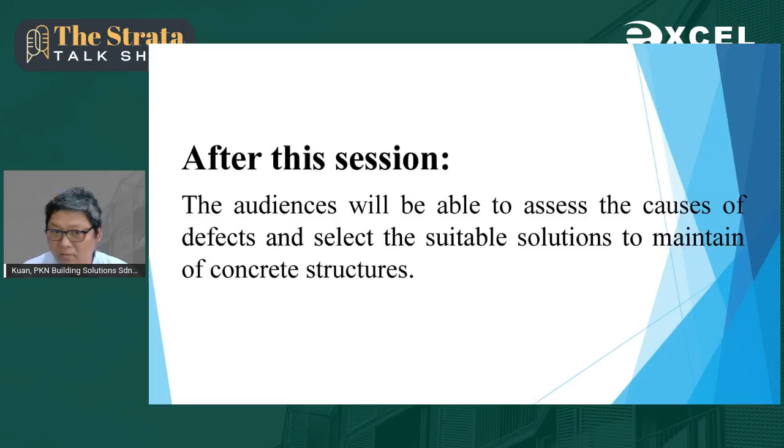This session is to help the audience understand why concrete needs maintenance over time, as it is not as robust as before. I hope everyone can hear me clearly. Can I have some comments if you can hear me clearly?

I'm a speaker on interfloor leakage and also a speaker on EN1504 for the Institution of Engineers Malaysia, on crack prevention and remediation measures for leaking walls and cracks, also for the Institution of Engineers Malaysia. I've spoken on advanced building inspection for a conference organized by JKR and UM jointly, and on defect management in stratified buildings for the Royal Institution of Surveyors Malaysia. I'm also on the drafting committee for CIS 7 about QLASSIC for the latest version.

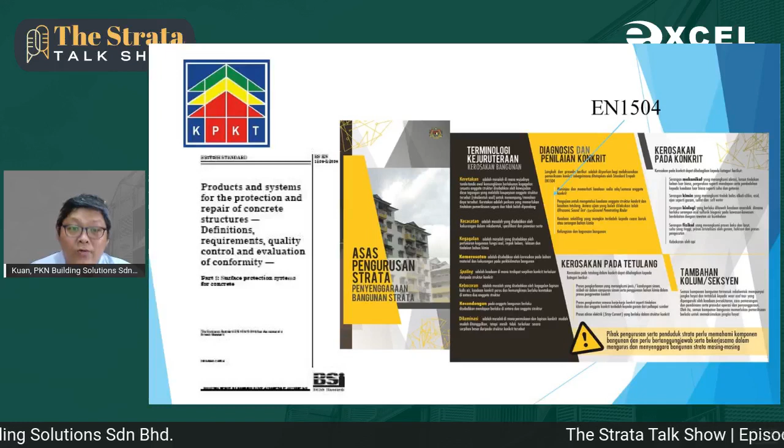Why are we talking about the repair and maintenance of concrete structures based on EN1504? There's a good reason - it's recommended by KPKT, and it's a national standard for Britain and the European nations, which approaches concrete maintenance in a holistic and scientific method, from multiple disciplines including corrosion engineering, addressing root cause for optimization of life cycle cost and durability. This is a brochure published by KPKT recommending EN1504 for the diagnosis and repair of concrete structures.

Pemeliharaan bangunan strata. Okay, in fact, besides EN1504, you can see clearly that it was only launched in 2009, so it's pretty new knowledge. Thereafter, America and Australia tried to catch up - the American community under the American Concrete Institute launched 562 in 2016, and the Australian community launched their guide to concrete repair in 2018. So this is really new knowledge being promoted globally, due to the fact that concrete is not as robust as what we used to think.

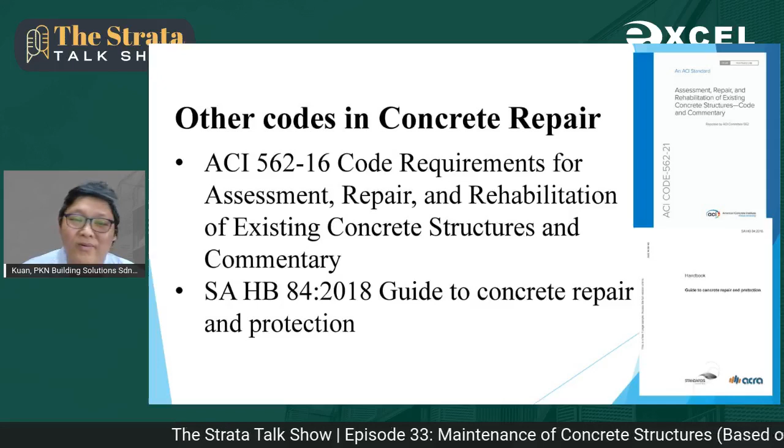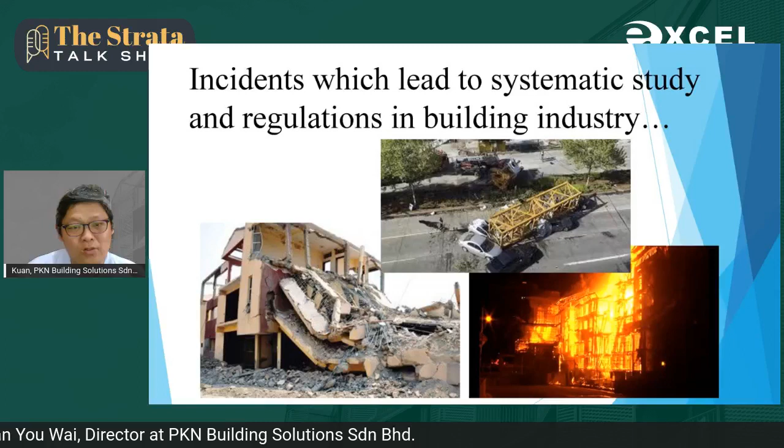Let me tell you a story about concrete. The history of buildings - people started to live in caves, started to build timber structures, and started to build taller buildings with the innovation of cement. With the use of reinforcement steel bar, buildings kept going higher and higher. But progress eventually encountered problems, and after investigation and debate at different levels of authority, this eventually became regulation - that concrete structures must be able to hold the load, must be safe, the practice must be safe, and the building must be fire resistant.

So what is concrete? Concrete is actually known as artificial stone. Our ancestors used to build with natural stone - they cut the natural stone into the size and shape they wanted, and assembled it. But in modern industry, we don't use stone that way. Instead, we use concrete, which is a mixture of air, cement, fine sand, aggregate, as well as water.

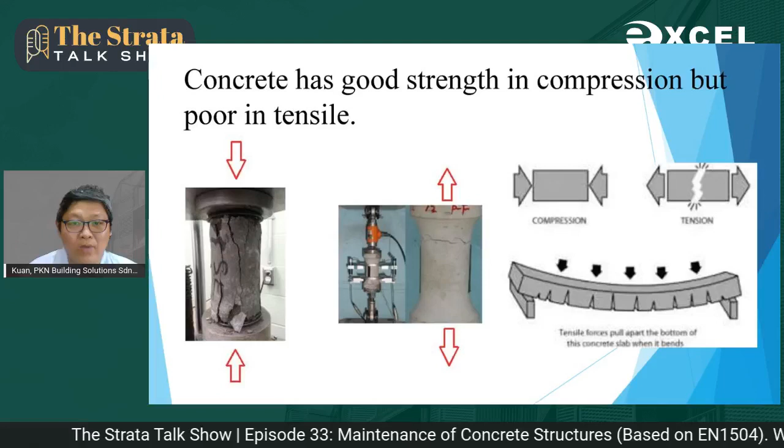When it is hardened, it has very good compression strength but is very weak in tensile strength. So when you compress it, it's very strong, but when you pull or bend it, it's indeed very weak - it cracks easily because of the brittleness. So how do we counter this?

The way we counter this is by use of reinforcement steel bar. Reinforcement steel bar is strong in tensile strength - when you pull it, it can resist the pulling to a huge level, depending on the hardness, the iron content, the carbon content, and the size. It can take different tensile stretches.

So that's why when we combine concrete with high compressive strength together with reinforcement steel bar with high tensile strength, it becomes so strong - strong in a way that it doesn't become brittle.

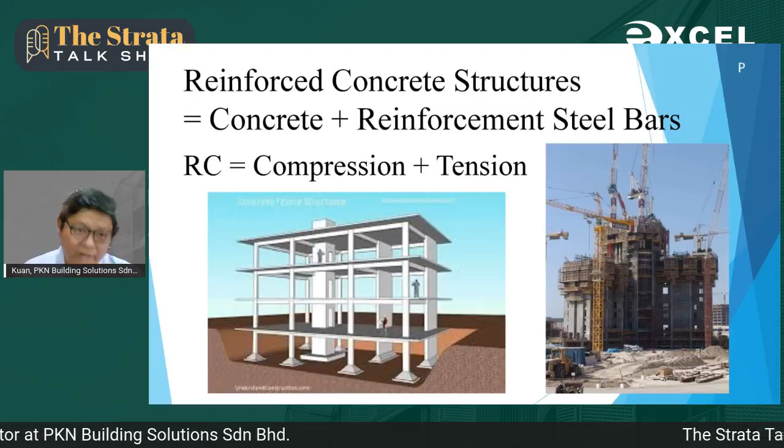It can actually flex a bit without being deformed. So that's how we get reinforced concrete structure, which is high in compression as well as tension, by the use of concrete and reinforcement steel bar.

Why are concrete and reinforcement steel bar used widely? Compared to other materials like pure steel or pure stone, it is much cheaper. Secondly, it is readily available because the major components of concrete are sand and aggregate, which is the stone. In Malaysia, we have granite stone of high quality very easily, and then cement, which mainly comprises limestone, which is also easily available and not expensive.

It is fire resistant and it expands and contracts identically, in a way I will elaborate later. The high level of alkalinity protects the reinforcement steel bar against corrosion.

This is what I meant by coefficient of thermal expansion. Concrete is between 7 to 12 times 10 to the power of negative 6. Steel is 11 to 13 times 10 to the power of negative 6. So when it is heated or when it is cold, it actually expands and contracts in a similar rate. That's why it can work perfectly.

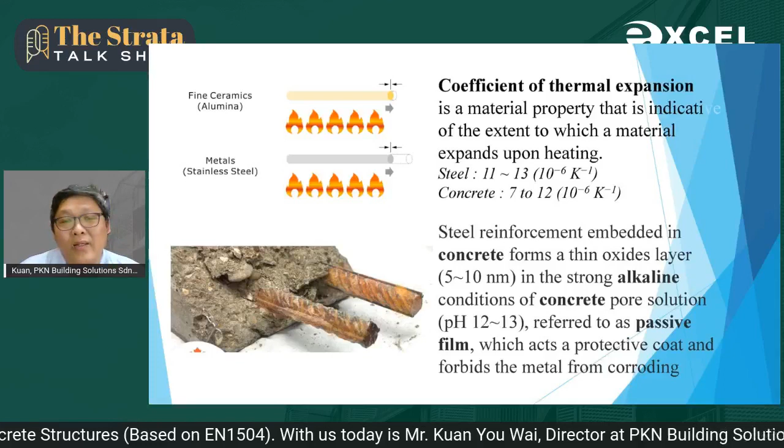The high level of alkalinity in the concrete, derived from the use of calcium carbonate or limestone, gives a protective layer. We call it a passive layer, or passive film, that protects the reinforcement steel bar against corrosion. So these are like brothers who are so well aligned to each other.

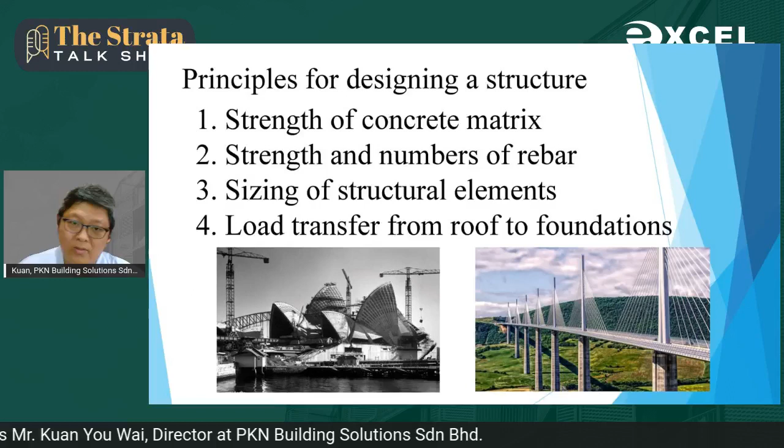When we design concrete structure, we have to know the strength of the concrete matrix, the concrete masses, then the use of rebar, where the tension force will be, and we need to counter it with a sufficient number of reinforcement steel bars with the correct sizing and placement. Then we have to design our structural elements with the correct size because of the load transfer. I would like to show you what the load transfer is.

Load transfer goes from the rooftop down to the pillar, the concrete slab, or the horizontal beam. That load will also be transferred to the pillar, and the lower the pillar goes, the more strength it has to take. So the pillars at the basement are the biggest compared to the pillar at the rooftop. This is how building structures design and transfer the load.

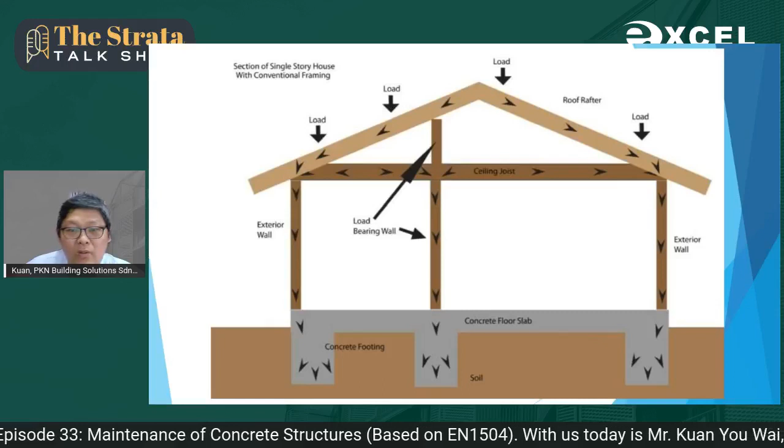Depending on the solidity and profile of the soil, piling may be required if the soil is soft, to hold the building vertically, in order to bear all the load that is transferred from the top to the bottom.

Now we come to talk about EN1504. The most important part is Part 9, about the principle of using different methods to repair concrete. Part 10 talks about different technology and methods, and the testing method is also discussed very thoroughly.

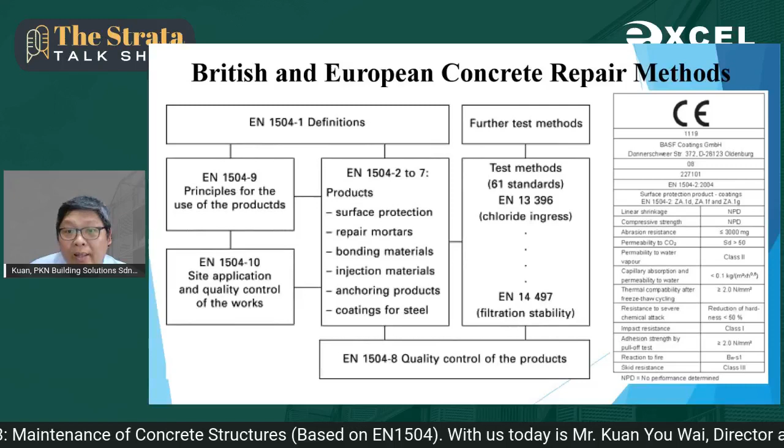Products in compliance with EN1504 will have a CE tag, showing which company it's from and which part of EN1504 it complies with. This is the tag you will normally find if the repair material is in compliance with EN1504.

Let's talk about what can go wrong during construction. Firstly, segregation: due to over vibration, the paste floats up and the aggregate goes down. Secondly, there's the spacer that keeps the reinforcement steel bar in the correct position, because in reality, after this BRC mesh is laid on the concrete slab, workers will walk around and press it down. So when the reinforcement steel bar is not in the correct position after being pressed down, kicked away, or messed up, the properties of the whole design will go haywire.

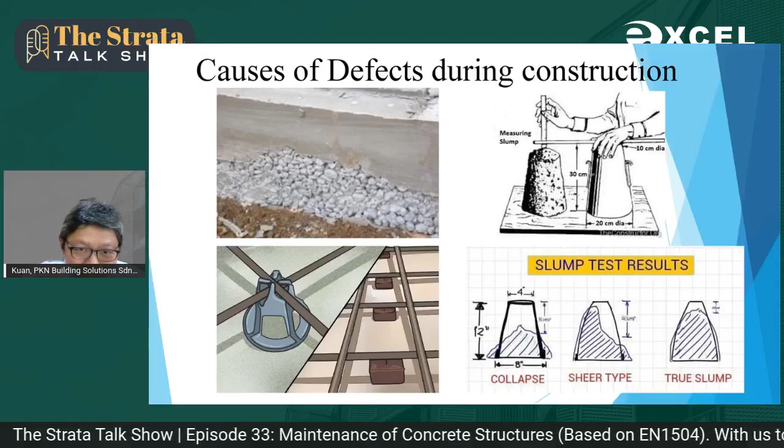Thirdly, the slump test relates to the water and cement ratio. Water and cement ratio plays a crucial part in the strength of the concrete, so it must be the correct ratio, and at the site no extra water should be mixed in.

If we use the wrong type of aggregate that expands in the presence of water, this is what we call alkali silica reaction, where the concrete will crack by itself so badly that it disintegrates. In the presence of salt, corrosion will also occur—if the sand comes from the seaside and contains salt, the concrete will disintegrate rapidly, and the reinforcement steel bar will start to corrode even with very minimal presence of water.

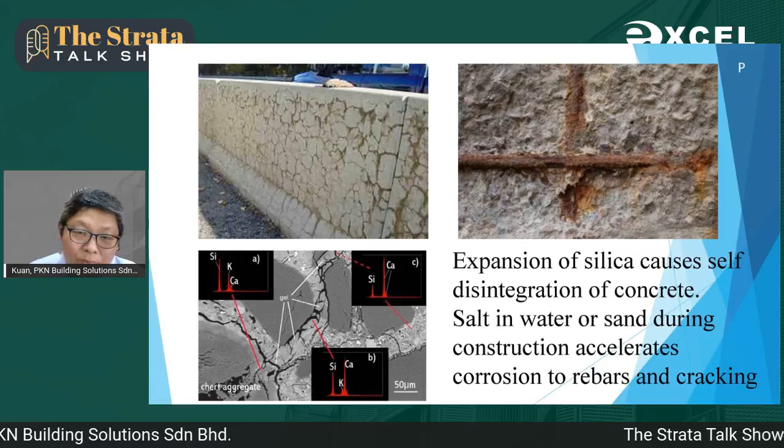So of course, when a car or machine hits the concrete, it can also be damaged. And the presence of water causes deterioration during the service lifespan. Once people start to occupy the building, this presence of water can also cause evidence of efflorescence.

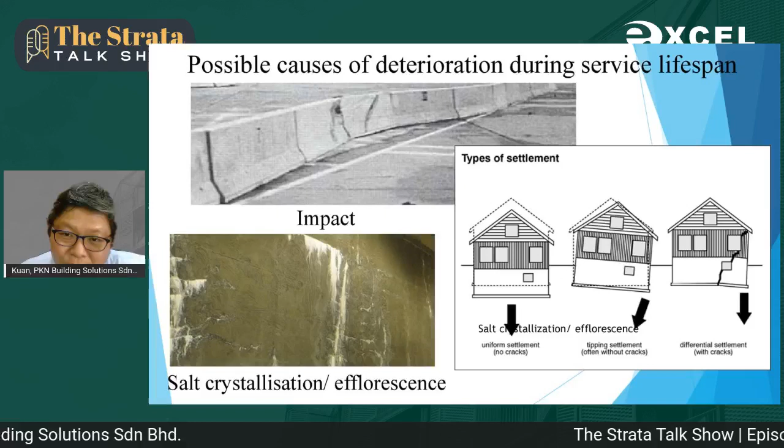And differential settlement. Natural settlement, where the building eventually settles down in the first 10 years, is normal, except some utilities underground will be compressed and broken. If the building settles evenly, it's still not so bad. The worst case is when some parts are strong and some are not strong - this is called differential settlement, and it causes diagonal cracks.

In areas of the septic tank or STP, the production of acid by bacteria, as well as the presence of hydrogen sulfide, can erode the concrete very fast. Unauthorized loading at the bottom will also cause a lot of cracking. Different types of crack have different implications, which I will elaborate later.

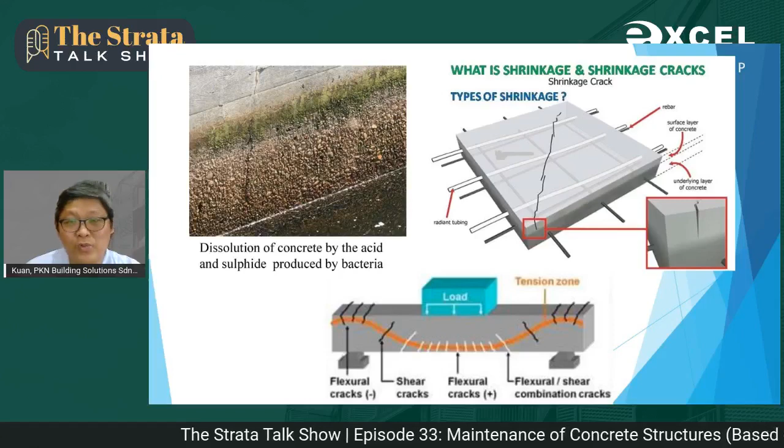But there's also natural shrinkage due to the evaporation of water. Water actually comprises 30 to 40% of our concrete originally. So when the water evaporates, it will shrink naturally, and such shrinkage will be evidenced by natural shrinkage cracks like this, which have no structural concern but still need to be repaired.

A building is built to separate our internal environment from the external one. So the issue is that our environment, compared to the UK environment where our Portland cement originated and where our building design originated, is very different.

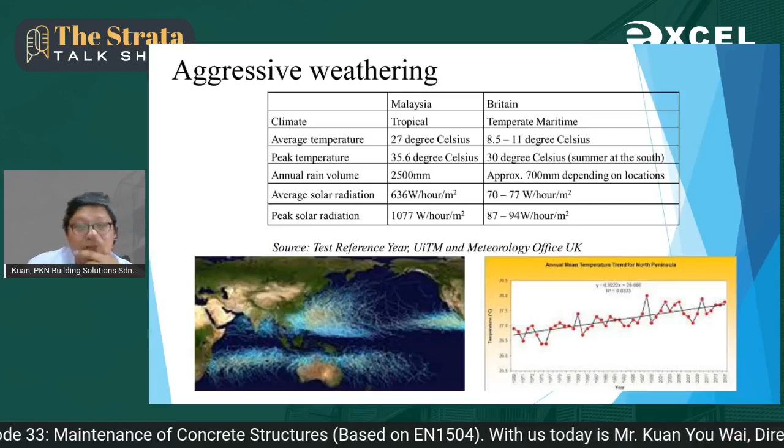BS 8110 is the design code for the design of concrete structures in Malaysia. But BS 8110 is designed based on the situation in the UK. Back in Malaysia, our intensity of rainwater and intensity of heat is so intense, so extensive - that's why it creates a lot of problems for us. And with the arrival of climate change, things are even worse, due to heavier rain, stronger wind, and worsening heat waves.

So heat-induced crack is a major issue in Malaysia. Even in the UK they realize that heat is a problem for them, but in Malaysia, which is in the tropical rainforest climate, this heat is even more damaging to us.

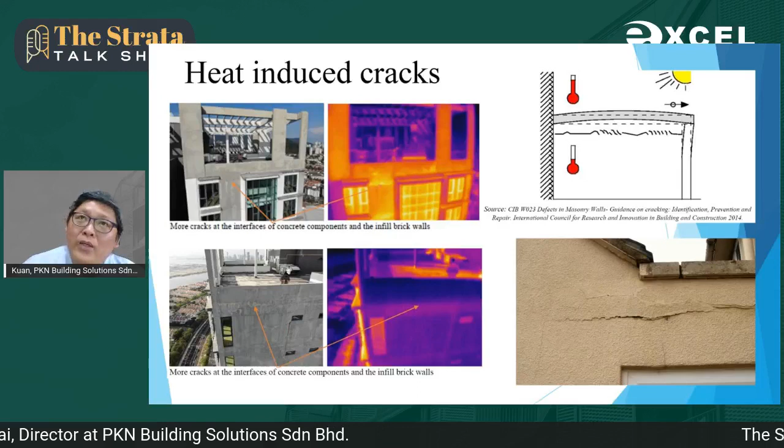From a primary study done in University Malaya under Dr. Zahiruddin, we know that at 1:30 p.m. the average heat on the flat roof reaches 82 degrees Celsius, and at 4 a.m. it can go down as low as 17 degrees Celsius, overall on average.

Another issue we have in Malaysia nowadays is earthquakes. After the Aceh earthquake in 2004, the landmass in Malaysia is no longer earthquake-free. As a result, the building code known as MS EN 1998 has been included in the Uniform Building Bylaw. The impact is that in future all our new buildings must be earthquake resistant.

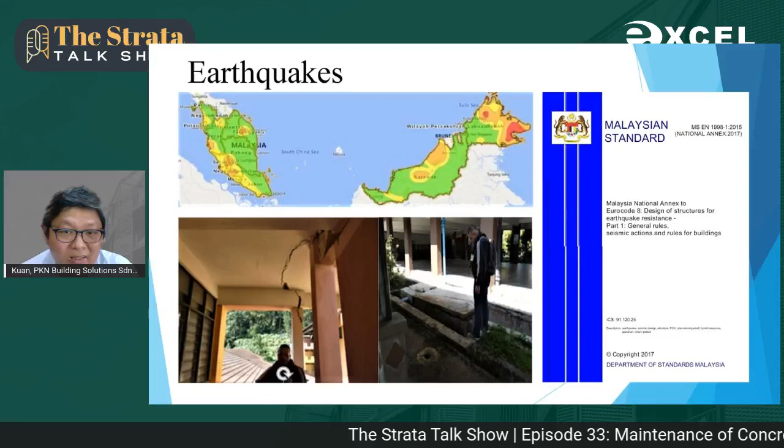However, what about our existing buildings? They need to be retrofitted, to be strengthened. This is actually a photo in Bukit Tinggi. Back in 2006, if I'm not mistaken, there were 13 earthquakes, with magnitude around 3 to 5, between 2006 to 2007 in Bukit Tinggi, where the epicenter is in Peninsula Malaysia.

For your information, besides Bukit Tinggi with the highest risk of earthquake in Malaysia, the second highest risk is Central Kuala Lumpur. Manjung, Kuala Lipis, and Kenyir are areas also with some level of earthquake risk. So I would urge you to look into earthquake retrofitting to salvage your building given the reviving seismic activities in Malaysia.

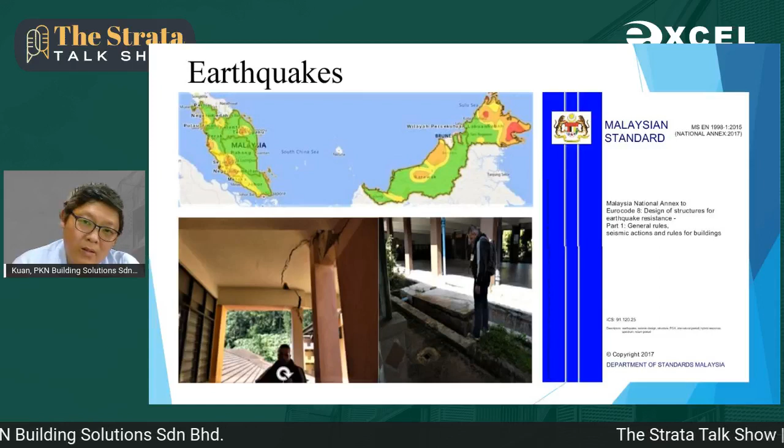As for East Malaysia, especially Sabah - Ranau, Kudat, and Sandakan side - they are known to be very active nowadays. So I'm still working with different municipal halls to update them pertaining to this standard, together with Professor Azlan Adnan.

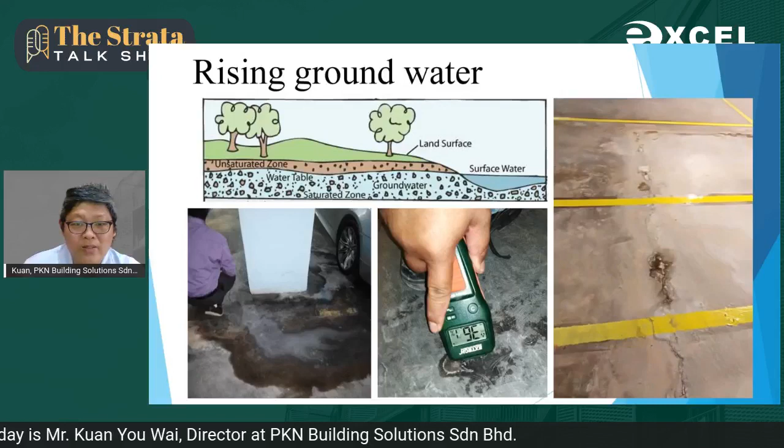Due to climate change, our groundwater is also rising. I have discovered more and more lift pits fill up with groundwater nowadays, and in basements, the chemical content in the groundwater can determine how detrimental it can be. I will show you more info later.

From different standards, EN1504, ACI 562, and the Australian standard, it has been well recognized unanimously that corrosion is the biggest headache of concrete. How corrosion can affect concrete, we'll elaborate more later. But basically, in a nutshell, it's an electrochemical process where in the reinforcement steel bar, due to the failure of the protective layer of high alkalinity, corrosion can start. I will elaborate in further detail shortly.

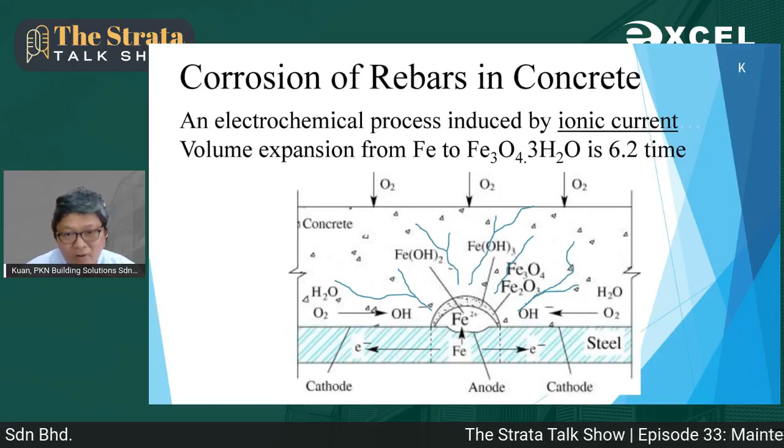The original size of the reinforcement steel bar can be 10 mm. Upon full level of corrosion, it can expand up to 6.2 times the original size, up to 6.2 mm increase. So the stress actually comes from inside the concrete. And once the corrosion cell is formed, even if we waterproof the concrete, the corrosion activity will slow down a bit, but it will continue cracking the concrete from within continuously.

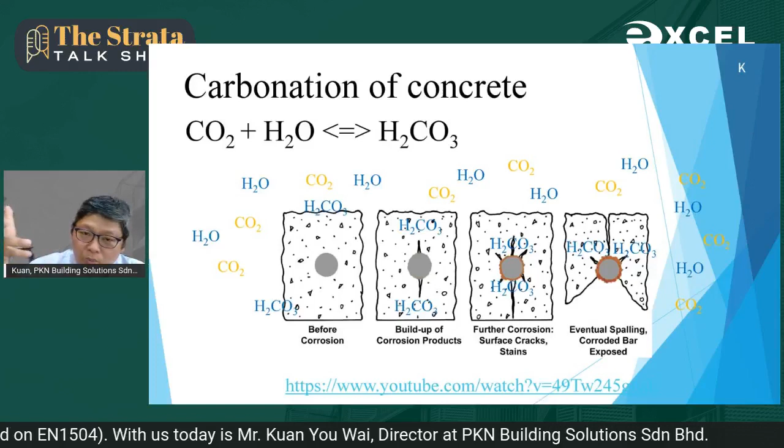Carbonation is one of the major causes of corrosion. Our rainwater, upon exposure to carbon dioxide, will form carbonic acid. Carbonic acid will neutralize the concrete. The original pH of concrete is 12 to 13, and the carbonic acid can bring down the pH lower and lower. When the carbonic acid neutralizes the concrete to a pH of 9, and reaches the reinforcement steel bar, then corrosion will start. It will crack the concrete from inside, and eventually you will see something like this in your structure.

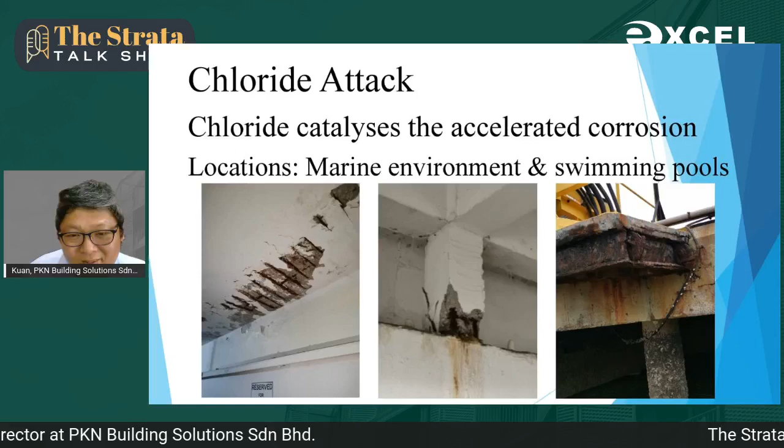In the presence of chloride, which acts like a catalyst, it actually accelerates the corrosion at a much faster rate. This type of chloride is found in marine environments and swimming pools. Do you know our swimming pools are actually chlorinated in order to maintain water quality? But the chlorine in the water is so detrimental to our concrete. For your information, the first two photos actually come from a swimming pool.

And the third photo actually comes from a marine environment in a port. How fast the corrosion can start really depends on how impermeable your concrete is, the porosity of your concrete. Of course, the more porous it is, the faster water can travel.

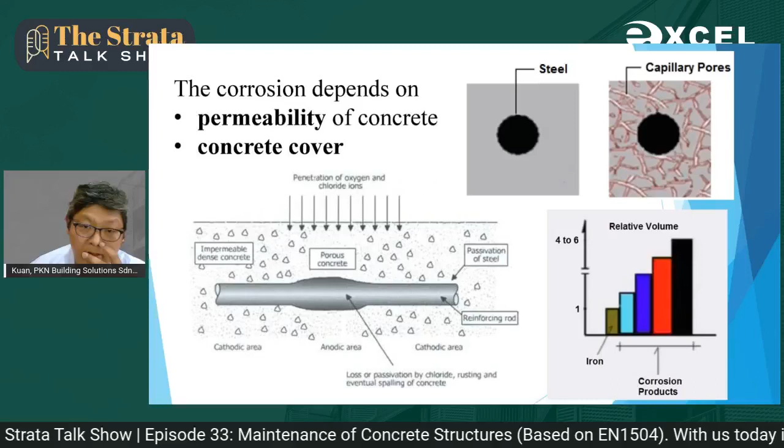That brings us to concrete cover. The concrete cover is actually the distance between the reinforcement steel bar and the surface of the concrete. It's known as concrete cover. The thicker the concrete cover, the more durable it is, because it will take longer for water to go through. In marine environments or swimming pools, we actually need to add additives to make the concrete more solid and dense. These are all special requirements for structures exposed to chlorinated water.

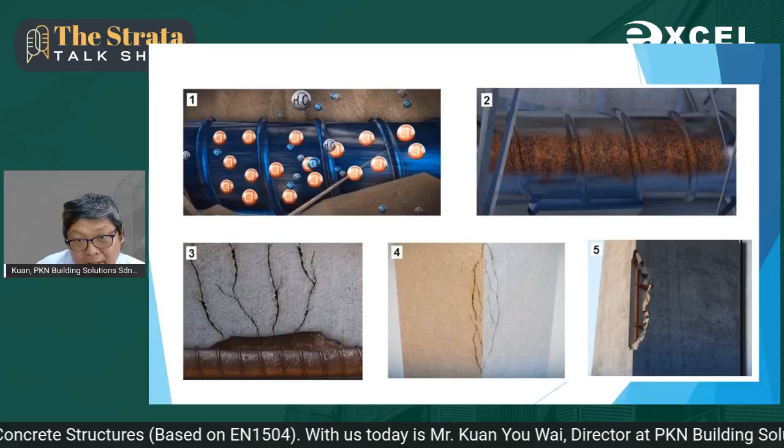This is how it actually happens. If you go to YouTube and search concrete corrosion, you will find a video animation that shows once the chloride ion starts to infuse into the concrete and reaches the reinforcement steel bar, it will trigger corrosion, and the rust byproduct will crack the concrete because of the increase in volume. Once the concrete is cracked and eventually pops, you will see the rusty reinforcement steel bar on your structure element.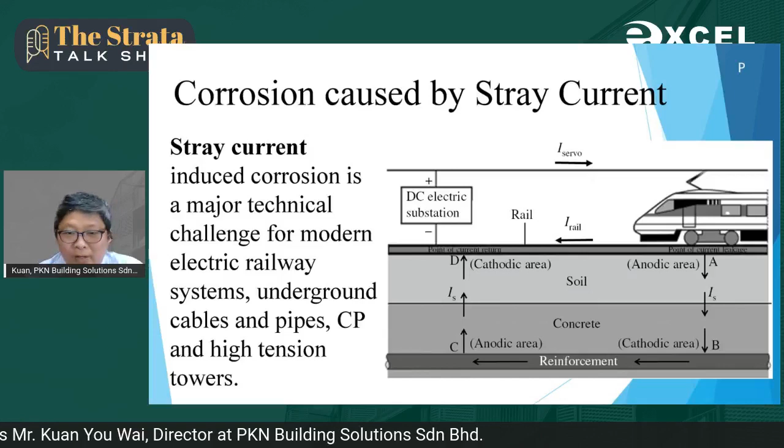This has been studied and evidenced in North America many years ago, but I came across a corrosion engineer who told me that in Malaysia, our railway also uses direct current, and we are not sure if any assessment has been done on the corrosion risk of this electrical system. So this is something I will write to the authority about.

Okay, so now we talk about how pillars fail. For your information, pillars take a lot of load, so any abnormality on the pillars is not acceptable.

Not all types of crack are dangerous, but I would like to show you a few types. Firstly, the type of crack that goes through from top to bottom, as in the first image. This one needs to be taken care of - you need to get a structural engineer to inspect it.

The second type of crack, shown in the second photo, is a flexural crack, which is not as dangerous, but it needs to be repaired because the diffusion of carbon dioxide into the concrete will trigger carbonation. So any crack must be repaired.

For your information, CO2 can infuse into the concrete easily at the slightest crack. But for water to be able to travel in, it only needs a crack of 0.23mm, equivalent to the thickness of your hair, for the water to be sucked into the concrete, simply because there's a lot of mineral in the concrete. The mineral will pull in the water through the osmosis process.

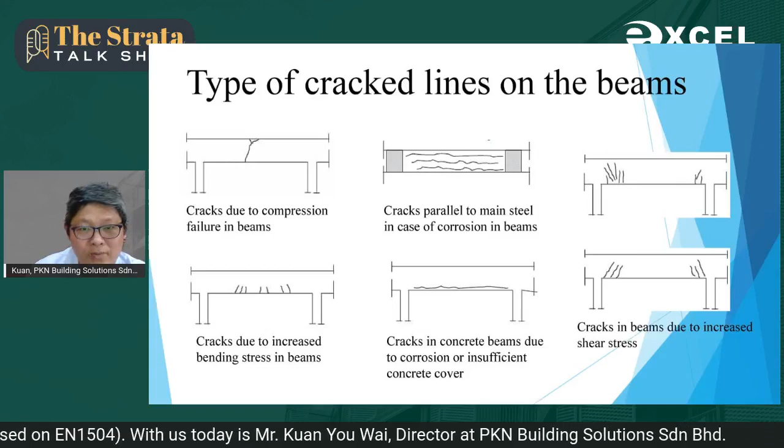And of course, there's corrosion crack, which happens along the reinforcement steel bar, because once the reinforcement steel bar starts to expand, it will crack the concrete cover, which is the thinnest part surrounding it. So it can typically be seen along the reinforcement steel bar in a very clear pattern, and this is also dangerous.

The most dangerous one is shear crack. Shear crack can collapse anytime. The crack actually happens from the front and the back - it extends all the way through from the tension zone to the compression zone. This type of crack can collapse anytime. I urge you to look into this type of crack and get your structural engineer to come in for an assessment.

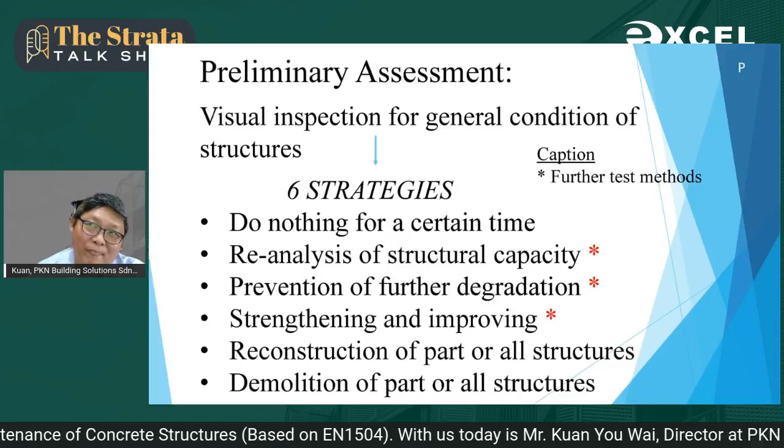Let's talk about the strategy we can have when we encounter deformation or dilapidation of concrete. First of all, if I design a structure to last 30 years, something like a warehouse, and in the 25th year it has a lot of problems, actually I don't need to do anything, because after some years I will demolish it. So one of the options is to do nothing.

The second option is, of course, you need to analyze, or you need to prevent, or you need to strengthen, or reconstruct, or demolish it thoroughly. So there are six strategies to it.

The one I put a star on actually needs further diagnosis. So these are the ways of diagnosing cracks. First of all, we measure the crack line - anything more than 0.3mm on the structural element, not on the surface.

I need to remind you that even though we see a pillar, we need to remove the cement screed on the pillar to measure the crack on the concrete itself, not the cement screed. So this is something we need to be aware of.

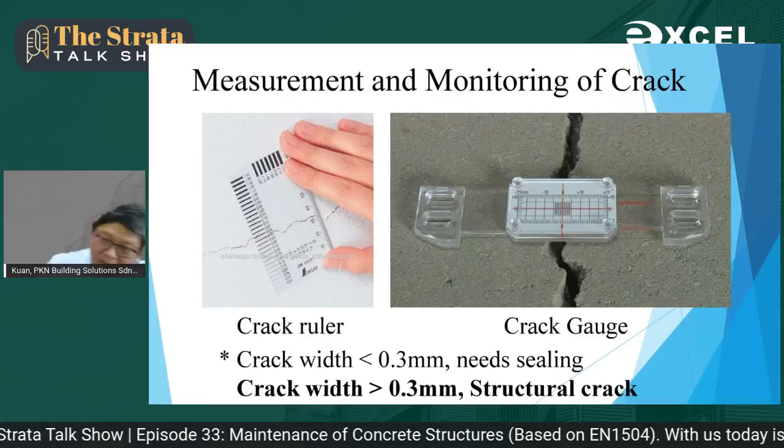Based on BS 8110, anything larger than 0.3mm on the structural element - if it happens on your pillar, that is even more severe. If it happens at the lower part of your building, the pillar in the basement is even more severe than the one above. So it all depends on the location, and whether it's a primary beam or secondary beam - it all depends on the load that it carries.

In order to check the propagation of crack inside the concrete, one way is to use ultrasonic pulse velocity - the wave method, the sound wave, similar to the ultrasound emitted by bats. So in engineering we use the same principle, known as either impact echo or ultrasonic pulse velocity.

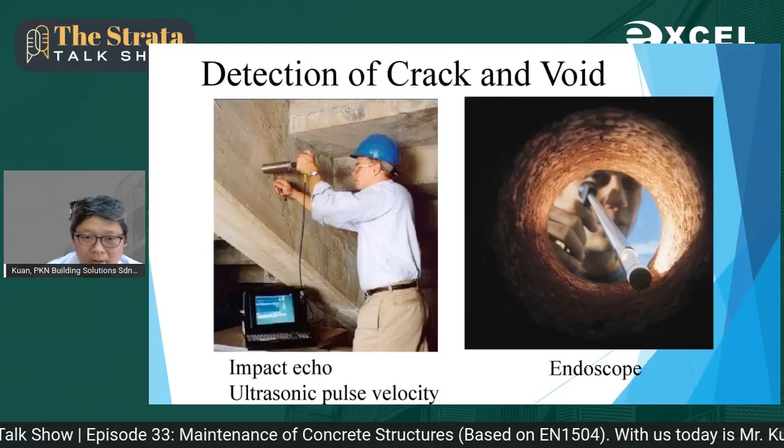Besides that, we can also use an endoscope to look into what is inside the crack. Once there is delamination or crack, any diffusion of water into the concrete or any air into the concrete can be identified easily with infrared imaging.

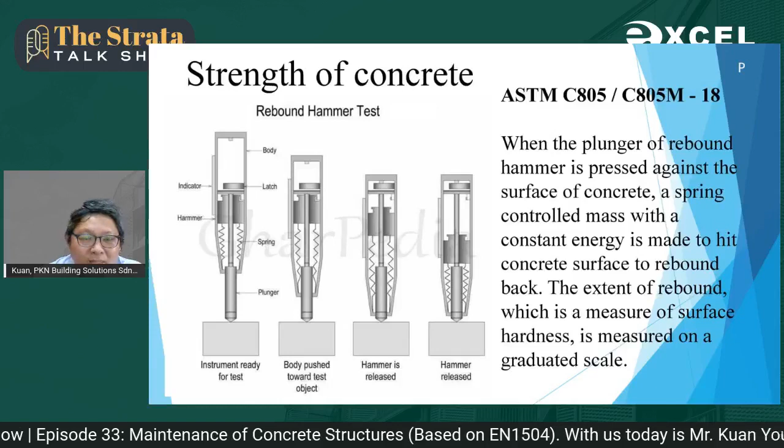Rebound hammer is an in-situ method to detect the compression strength of the concrete. But the weakness is it always gives a higher reading, about 50 to 60% higher than what it actually possesses, if you do a coring and send it to the lab for compression testing.

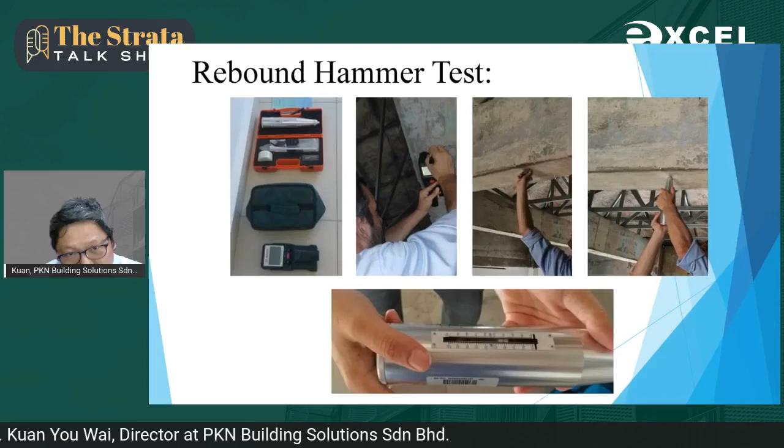This is simply because when we hit on the concrete, sometimes we hit on the concrete with a reinforcement steel bar right below it. So the more correct way is to use a scanner to identify where the reinforcement steel bar is, and we only use our rebound hammer to measure on an area without reinforcement steel bar, or in between two reinforcement steel bars, so that we can get a more accurate reading. This is how we did it on site.

To detect where the reinforcement steel bars are, the number of them, and the size of them, we can use ground penetrating radar, which comes in a handheld form, very handy nowadays, like a wall scanner or concrete cover meter. The cover meter will show me the concrete cover thickness, which is an indicator of durability, as I've explained.

And the carbonation level, using phenolphthalein liquid. I have some here. If I spray this on the concrete, anything with pH less than 9 will become transparent, while pH more than 9 will become purple in color. So I can see exactly what is the depth of carbonation, and most importantly, whether the carbonated concrete has reached the reinforcement steel bar. This is a very convenient and economic way.

And of course, we can measure the chloride content of different specimens from different depths, based on a standard called NT Build 443, the accelerated penetration of chloride into hardened concrete, for which I have the machine.

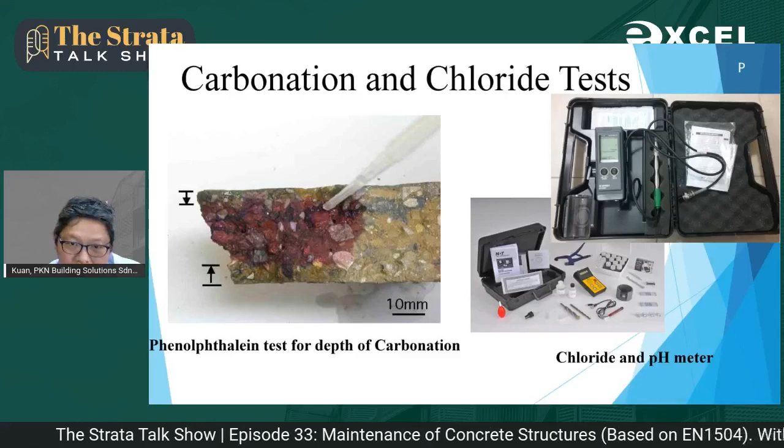We can also use different specimens to measure the pH of concrete. The higher the pH, the more alkaline it is, the more healthy the concrete. So the lower or more acidic the pH of concrete, the higher the risk of corrosion.

And of course, we can take the specimen, take the core, and send it to the lab to use a high precision microscope to see what is happening inside the concrete, known as petrographic imaging. This is what we have done in one of the hospitals in Seremban, this is the actual work that we have done.

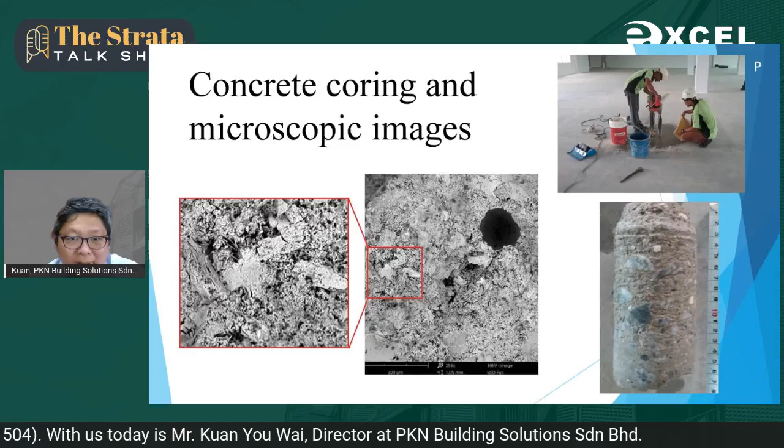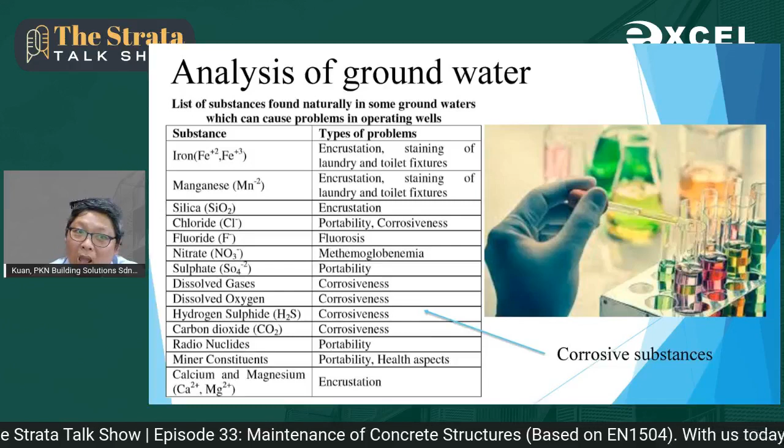And of course, you can send the water sample for pH testing and for E. coli. If the water comes from a waste pipe, it will have E. coli. If the water is highly acidic, maybe due to the peat soil underneath the building, then your building is at big risk. You can also see some components in the water sample that can be corrosive, like hydrogen sulfide, dissolved gases, and dissolved oxygen.

It's just like doing a blood test. Instead of cutting the meat to check, we can do a blood test or urine test, right? It's actually identical to doing water lab tests.

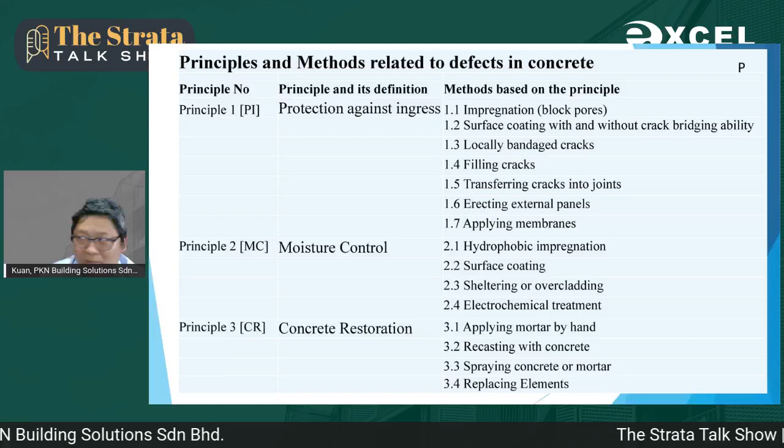And when it comes to the principles, there are a few, seven or nine, I will go through them shortly. The first principle is to stop the water. Second principle is to stop the moisture. Third principle, concrete restoration, is to do non-structural repair.

Principle 4, structural strengthening, is to do structural repair. Principle 5, improve physical resistance, is to prevent the ingress of water and carbon dioxide into concrete. Principle 6, resistance to chemicals, is of course to resist the ingress or diffusion of chemicals into the concrete. Principle 7, or there are 11 principles in total.

Principle 7 is to restore the passivity of the concrete. So instead of pH 9, how can we improve it to pH 11 or 12? This is a restoration of pH.

When it comes to principle 8, we talk about resistivity, which is another way to say corrosiveness. Then, cathodic control: how can we stop the corrosion activity at the cathode part of the corrosion cell?

Cathodic protection is how to use direct current to infuse electrons. Bear in mind, corrosion is a process due to loss of electrons, so how can we replenish electrons back to the reinforcement steel bar to stop the corrosion? And principle 11 is how to stop the corrosion activity at the anode part of the corrosion cell.

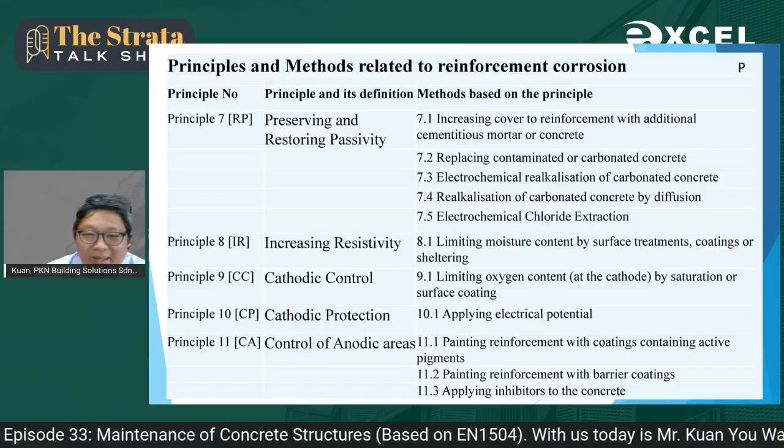So this is pretty much chemistry in nature, which a lot of structural engineers are not aware of. But I would urge you, if the structural engineer is not aware of this, please always remind them, because corrosion engineering is a subject in chemistry or material science, not actually a subject in structural engineering. So I urge you to be aware of this.

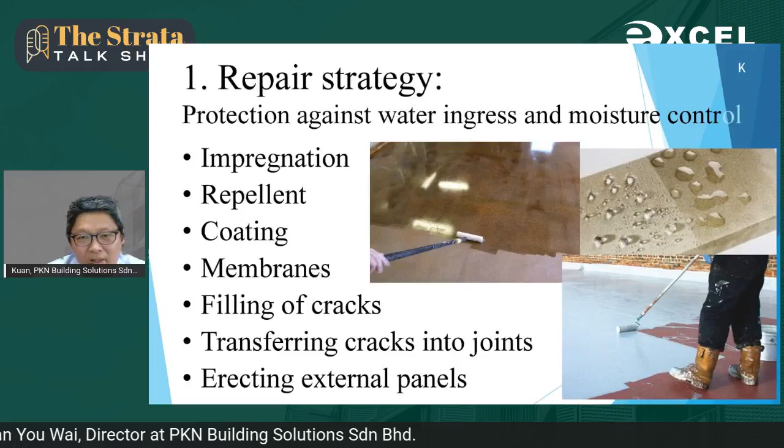Let's come to repair strategy. How to stop water: you can either use coating, repellent, or impregnator, as shown in this photo. What is the difference between repellent, another word for which is hydrophobic impregnation, and coating? They actually differ when it comes to resistance to chemicals, carbon dioxide, and water.

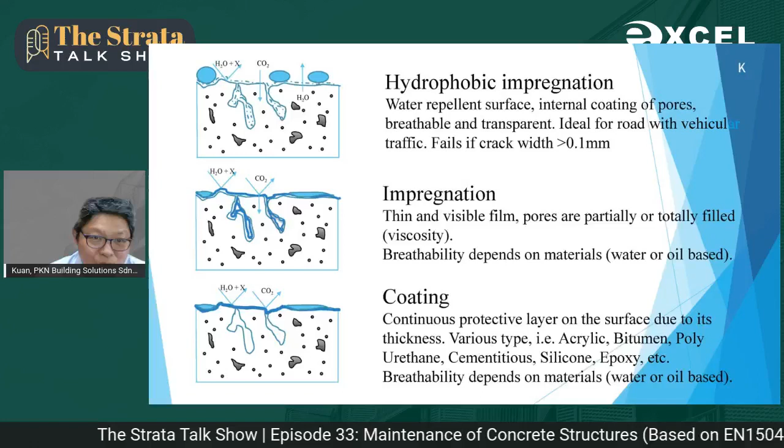So you can see some of them can resist water as well as carbon dioxide. Impregnation can only resist water, but some level of carbon dioxide can still go through. For impregnator, or hydrophobic impregnator repellent, water can be repelled away but carbon dioxide will still go in. But meantime it is also breathable, whereby the water inside the concrete can breathe out, and you see the water can go into a round shape like this.

When it comes to another way to block the water, of course you can have cladding, you can have torch membrane, or you can have single ply membrane. But I would like to bring to your attention, because of the nature of heat on our flat roof, white color type of membrane like this, which is permanently elastic, is very suitable for the flat roof in Malaysia, as compared to torch membrane.

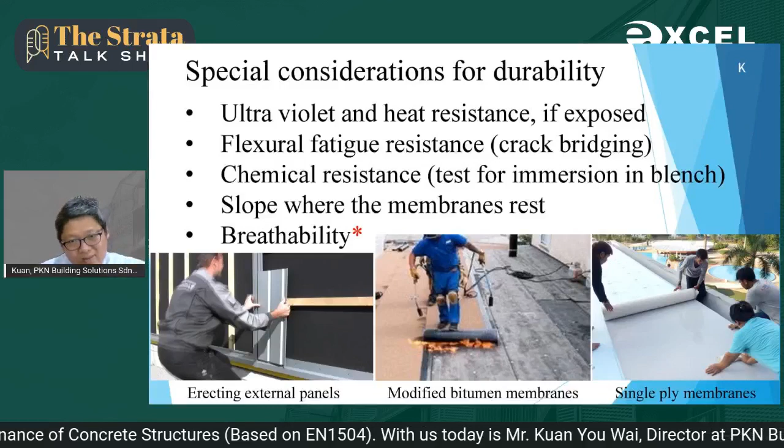Torch membrane has a layer of stone chips on the surface. It's black in color, and it actually is very good in absorbing heat, and the heat absorbed through the torch membrane causes further expansion to your reinforcement slab, the concrete slab. As a result, the stress due to the expansion will crack the waterproofing or torch membrane on the surface. There are papers that say torch membrane is not suitable for tropical climates. Single ply membrane is more suitable.

And of course water will flow through the crack. So one of the ways is to fill the crack with epoxy, on the condition the crack is a static type of crack, maybe due to natural shrinkage. Then epoxy can be considered, but epoxy is not heat and ultraviolet stable, so it cannot be used on an area exposed to the weather. For any type of dynamic crack, flexible sealant is actually more workable and more effective. PU grouting, I personally don't recommend unless it is caused by natural shrinkage.

And bandaging is actually a very useful way. We actually use elastic type of membrane, like for instance the single ply membrane like this, to bandage the crack, just like the bandage that we put on our wound.

So of course, when it comes to non-structural repair, say due to honeycomb or due to impact, we can patch back. The patching back is very important because it improves the resistivity to the diffusion of water as well as the carbon dioxide.

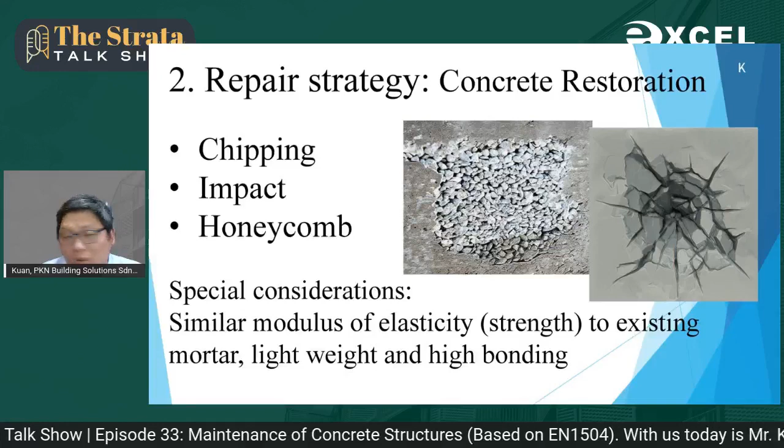Okay, this is how we patch. You can use spray concrete. We can patch with trowel, or for some simple structures we can even use formwork to expedite the work.

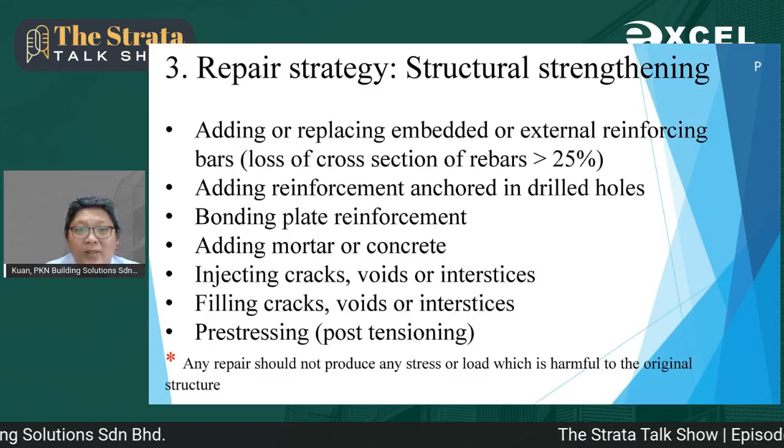And structural repair - bear in mind, crack is a major way that the concrete fails, maybe due to unauthorized loading. So there are a few ways to rectify and do concrete repair. Actually, concrete strengthening is taught in the structural engineering syllabus, so structural engineers are very well aware of this.

For carbonated concrete, we need to remove the concrete up to the bottom of the reinforcement steel bar and cast it with new concrete. Or we can increase the size of the existing pillar by adding another layer of reinforcement steel bar and cast another layer of concrete.

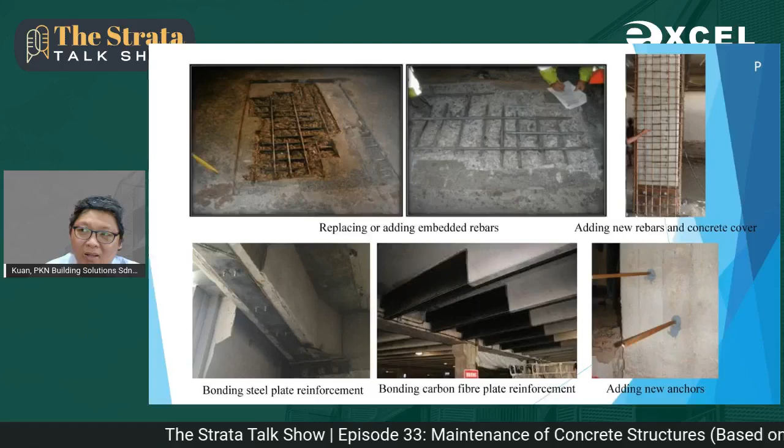We can also use steel plate to increase the strength of the beam, or fiber carbon. Meantime, for this type of work, a lot of time we need to do anchoring like this one. We use specially designed epoxy that comes with structural strength to do anchoring, which can enable us to design either additional thickness or additional beam.

So of course we can also use epoxy to glue back the concrete, but all this must be done by a registered structural engineer. Anything with structure must be designed and supervised by structural engineers. Bear in mind, don't simply trust a contractor who has little knowledge about this and do the concrete repair by yourself, because the liability is beyond your level, even beyond my level.

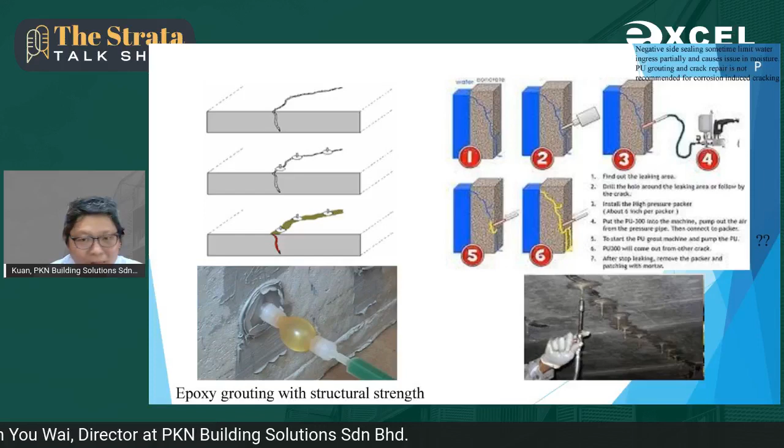So I would like to ask a question now. In this type of chipping, where the edge of the concrete pillar is chipped from top to bottom, some of the old methods in the 60s to 70s say that we should use limestone, lime mortar to repair it, simply because it's breathable. But studies show that it typically fails within 10 years, because the lime mortar doesn't have the structural strength to help share the loading that transfers from the top to bottom.

So, should we use concrete of similar strength to the existing pillar, or should we buy from Sika or Mapei or whatever company to use high strength mortar to repair it, or should we strengthen the pillar?

Actually, I have pondered this question for quite some time. First, if we use limestone mortar, it has no strength to help share the loading capacity. If we use high strength mortar, the load will go to the small portion of the new high strength mortar, and it is too tiny to take the load. If you use something of similar strength, well, because it has already failed, using similar strength will soon fail again, right? So in fact, we need to strengthen this pillar, and that requires going through proper analysis. Please let the competent person do it, let the structural engineer do it, because they will sign on it and take responsibility for their design.

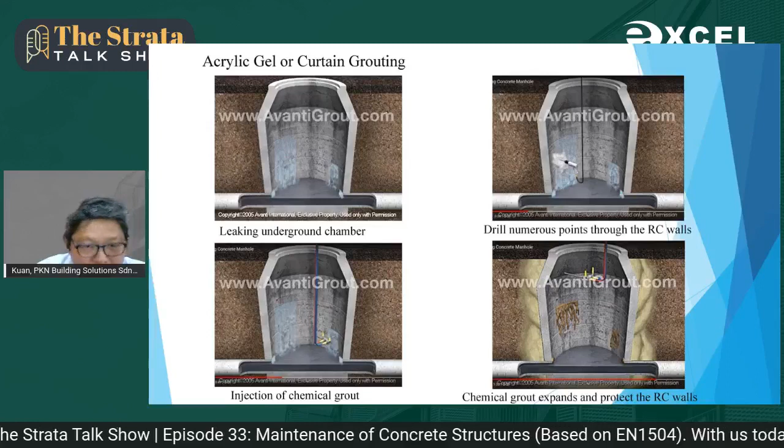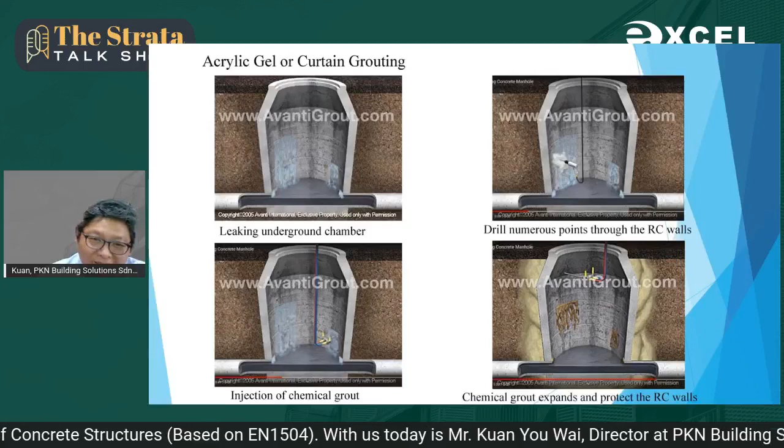So let's say basement, lift pit, or underground chamber - when water comes in, one way to solve it is to drill a hole through, pump in chemical to the back of the structure, and let the chemical expand and form one layer of impermeable skin to protect the underground structure. But I actually have a lot of doubt on this method, because in Malaysia water pressure is so high, in this type of situation I really have some reservations. But again, let the competent structural engineer handle it. Don't do it by yourself, don't simply trust your contractor - instead, get a structural engineer in.

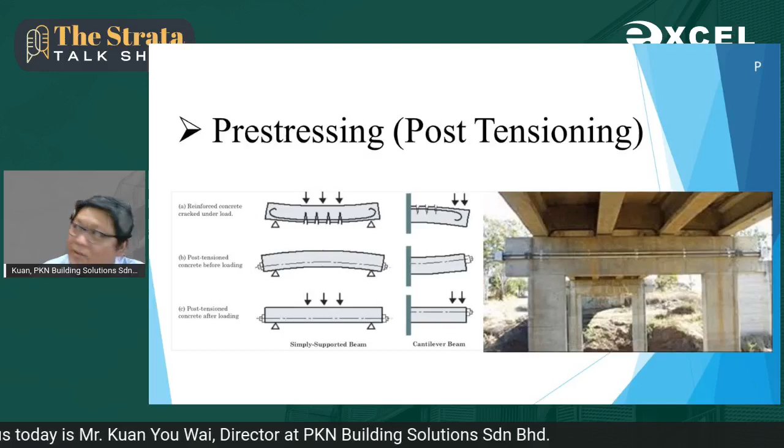And of course, this method - when the concrete starts to bend, we can use tie or cable to hold it back. This is called post-tensioning. This has been applied very successfully on the highway near Kepong. You can see this method under the bridge, under the flyover in the Kepong area.

And of course, if we apply coating - PU coating, epoxy coating - this repair strategy can reduce the diffusion of carbon dioxide as well as water into the structure. Another way is to increase the cement screed. When you increase the cement screed, the water and air cannot easily diffuse into your concrete.

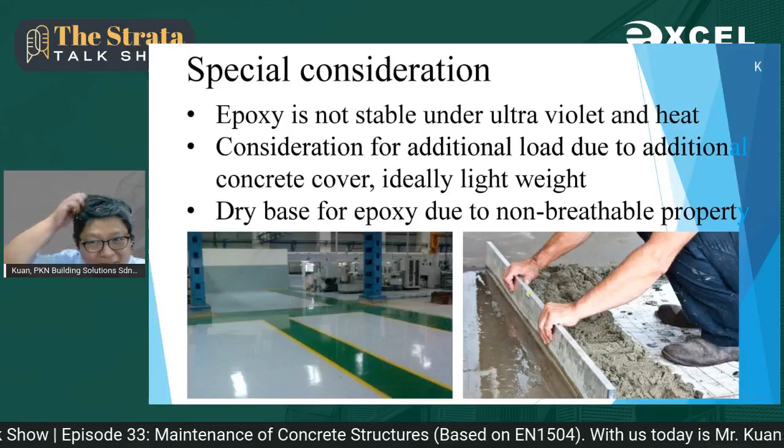So we come to principle 7: how to preserve or restore passivity, how to return the pH of concrete, which has gone down due to the diffusion of carbon dioxide, carbonic acid, or chloride. One way is for the contaminated concrete to be removed and replaced. Another way is, of course, to increase the cement screed thickness.

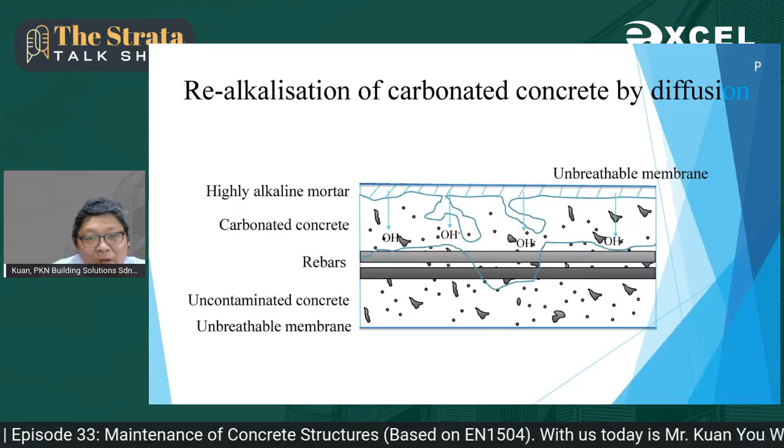And if we use liquid with very small molecular size particles, we can actually diffuse in a high level of alkalinity to the concrete by way of gravity. This has been done very successfully by a lot of German companies, and we also can do this based on our technology in Malaysia - by way of diffusion with highly alkaline liquid.

And I would like to bring to you electrolysis of water. This is what we were taught in secondary school, right? Whereby if we use an anode and cathode connected to a battery, the water can be segregated into O2 and H2, hydrogen gas and oxygen gas. With the same method, if we apply it to concrete, whereby the positive side is connected to the titanium or platinum mesh, and the negative side is connected to the reinforcement steel bar, we use a direct current to inject electrons. A similar reaction will happen in the concrete.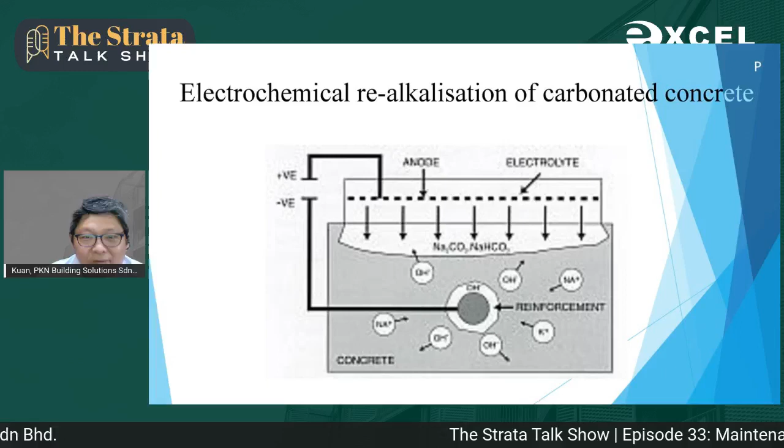Whereby the water will be segregated into OH negative, and then the hydrogen gas will be diffused off. So this is one of the ways to increase the pH, or the alkalinity, of the concrete.

And of course, by controlling the voltage, we can actually cause the chloride, which is negatively charged, to move away from the reinforcement steel bar. If we charge the reinforcement steel bar to negative charge as well, negative charge and negative charge will push each other away. If the voltage is energized to a higher level, even the H positive, even the chloride, can evaporate into the atmosphere.

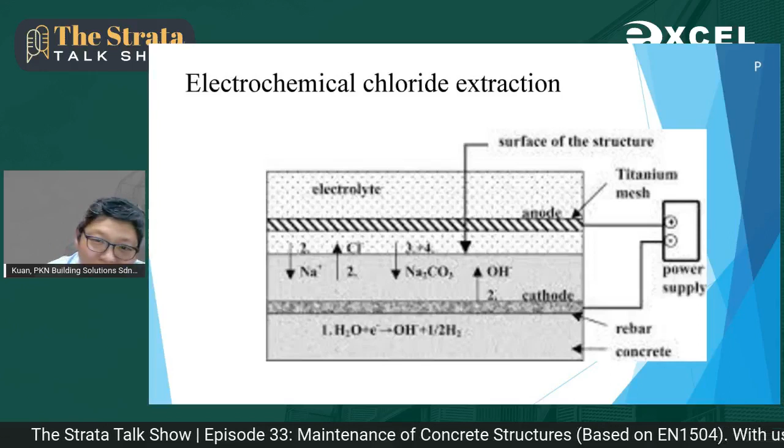But there is a limitation to it, though I would like to share with you - titanium mesh and platinum mesh. Titanium and platinum are precious metals. If we want to put one layer of titanium mesh or platinum mesh onto our concrete, it will cost a bomb, no one can afford it. So this method worked in the lab but can hardly be applied, especially when our currency drops so badly. Another way to control corrosion is to apply anti-rust, to apply corrosion inhibitor like this one.

From my own research and checking, I discovered this is the more feasible way, which only costs a fraction of cathodic protection technology, but it can actually stop the corrosion activity either from the anode side or the cathode side. It can retard corrosion activities, and it can even stop the chloride from being activated, depending on the chemistry of the corrosion inhibitor. Sacrificial anode and impressed current, I'll come to it shortly.

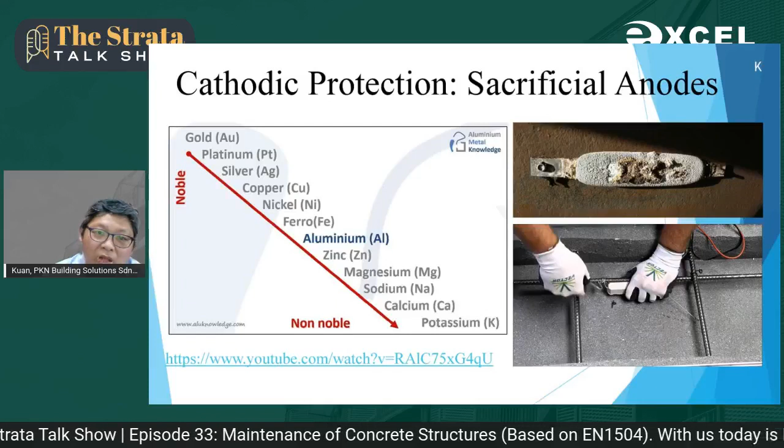Now, when different metals are attached together, the metal which is more reactive will sacrifice and oxidize. So let's say our steel is ferrous. If we attach it to aluminum or zinc, the aluminum and zinc will oxidize. As a result, the steel is protected and corrosion stops. This is some of the cathodic sacrificial anode that we can find in the industry.

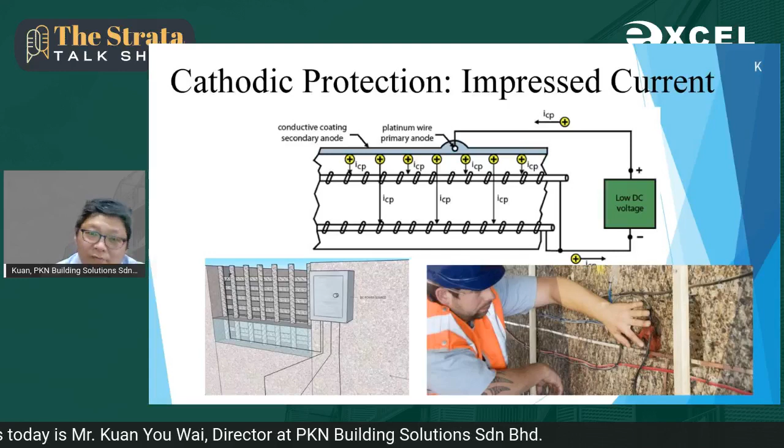This shows how it is attached to the reinforcement steel bar, and of course, impressed current, whereby we inject direct current, with a similar principle to electrolysis of water. Any loss of electron will be replenished back by the direct current with the injection of new electrons.

In conclusion, when we consider all this corrosion control or concrete strengthening, there are so many options. When we need to choose them, we need to know what is the failure mechanism first. We also need to know how feasible it is when it comes to dollars and cents, and of course, what is your expectation when it comes to safety and the service lifespan. Because each method has its pros and cons, we actually need to use them in combination so that we can achieve what we want to achieve.

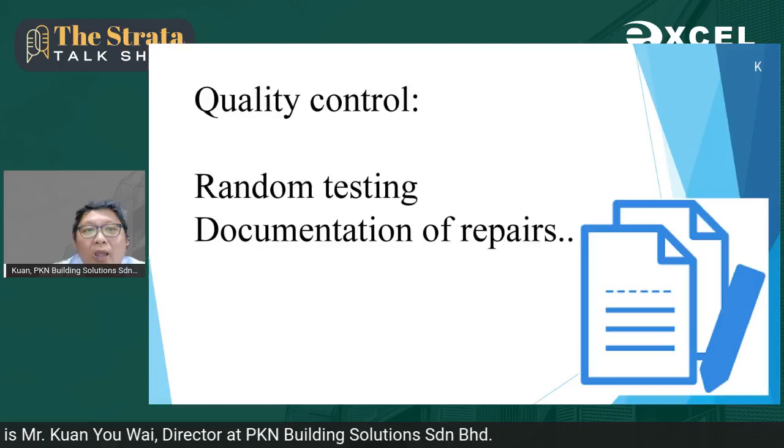When it comes to the rehabilitation of concrete, and of course quality control, we have to do random testing. We also need to document all the steps, and finally, this is the last part of my presentation. You can Google for my blog or my articles on the iProperty platform, or you can contact me if you have any questions. So I'll pass it back to you, the organizer.

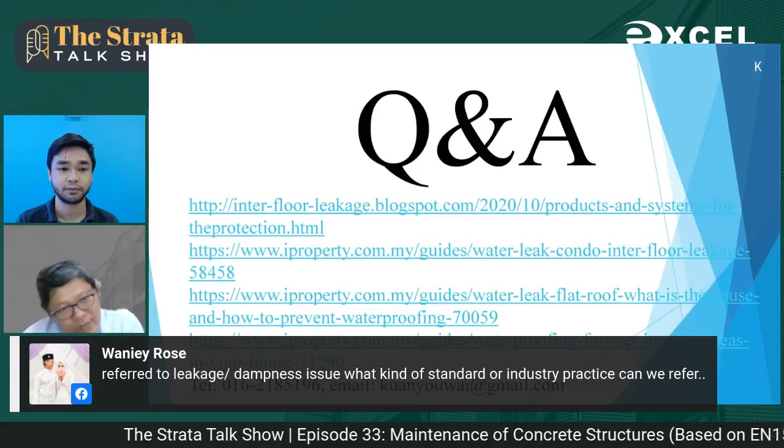In terms of leakage and dampness issue, what kind of standard or industry practice can we refer to? To be frank with you, Malaysia's Uniform Building Bylaw has a section, 84, which talks about preventive measures for dampness, but it is so brief, stating only that a suitable measure must be designed and constructed. How suitable is very subjective, because we don't have a clear guideline.

And in CIS 7, the description is also very vague, stating that any leakage which can be visually detected is not allowed. But a lot of leakage cannot be seen by the naked eye, so it's actually another contradiction and very vague. For your information, I am trying to develop a Malaysian standard for waterproofing under SIRIM, which is on the way.

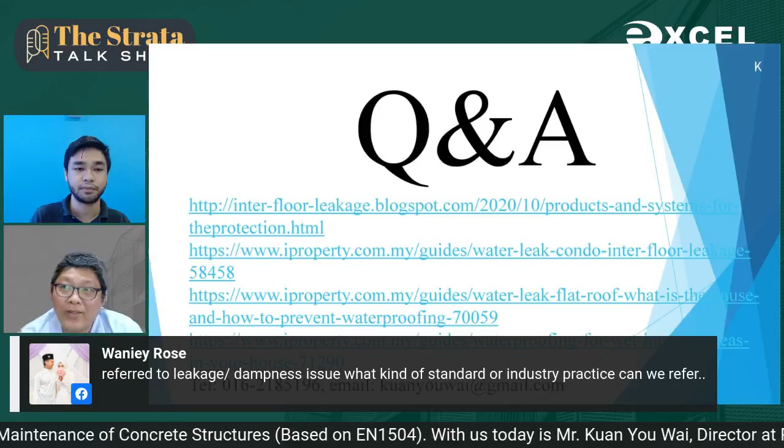We need to consider Malaysia's climate as well as our way of using water in our house. In the Middle East, they don't shower like the way we shower, because their weather is actually drier. As a result, they actually have a practice of dry toilets, which don't even need waterproofing. But if our houses in Malaysia don't have waterproofing, it's a disaster, with mold growing and paint peeling.

I have seen new houses where the architect did not design waterproofing for the toilet on the ground floor, because they thought we use a dry toilet method like in the Middle East, which is not the fact. So that's what caused me to have the urge to go through all the hassle to develop the standard for Malaysia, and hopefully, please pray for me, I can make it in my lifetime.

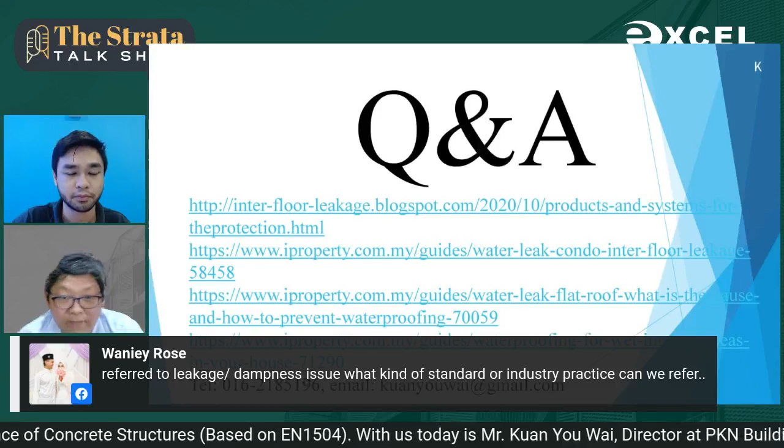So that's what I can answer. A consumer can use 'fitness for purpose' if it leaks, and you need to defend your right. You need to understand that any dampness is detrimental to us in terms of concrete structure as well as health, because excessive dampness can cause a lot of mold to grow. When mold comes, it's biological contamination, and people with asthma will have asthma attacks regularly. More asthma attacks, and people who don't have asthma eventually will develop it.

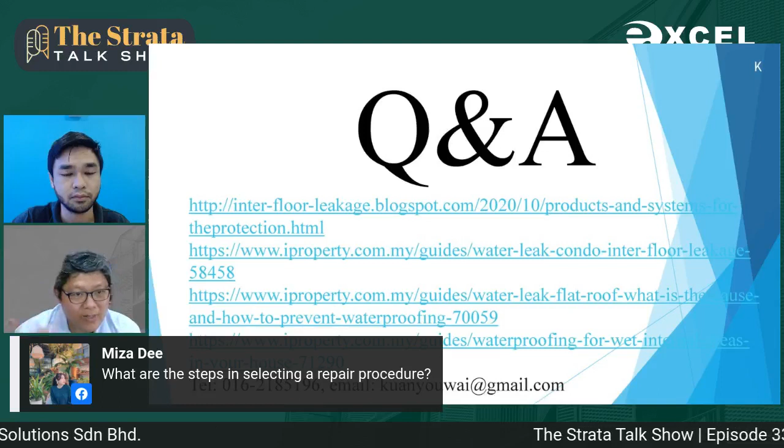The rationale is this: if you have your periodic inspection done earlier, then when your building reaches 10, 20, or 30 years and the local council writes to you for a periodic inspection, you can show them this letter proving you requested an earlier inspection, complied with all the engineer's recommendations for further analysis and repair, and had your repair certified. So when the next letter comes, you are actually exempted from the requirement for periodic inspection because you've already done it earlier.

So after your earlier inspection, you have another 10 years to go before the next one. This will save you money and protect your building against any doubt of deformation or damage.

Let the structural engineer go through the rest, but always remind them—I've already briefed some of them in IEM—that corrosion is an issue, and it's not taught to them because the standard is new; it hasn't gone into their syllabus yet. Even old-school, older batches of structural engineers have told me, 'Mr. Kuan, if you don't tell us chloride is so detrimental, we don't even know chloride actually exists in our swimming pool.'

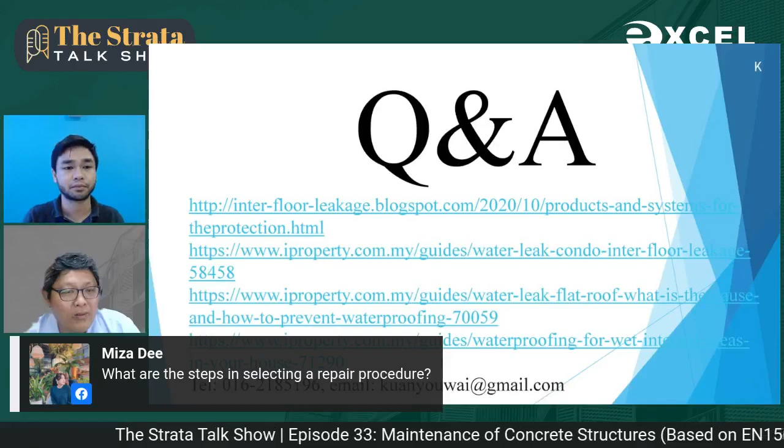So bear in mind, if the structural engineer doesn't know, you, being a building manager, please remind them. And of course, you can come seek my advice.

For the last question today, from Mr. Carson Chin: what are the possible decisions after finding a structure to be inadequate? It depends on the cause of inadequacy. If it's not strong enough, it can be strengthened. If corrosion starts to happen, it can be controlled. If the tensile strength or compression strength has dropped to a risky level, it can be salvaged with correct implementation of repair based on EN1504.

I hope I've answered you. If you have more questions, you can go to my iProperty platform or my blog for further answers. Most of what I want to tell you is written there, so you can access it at a time convenient to you, from any location worldwide.

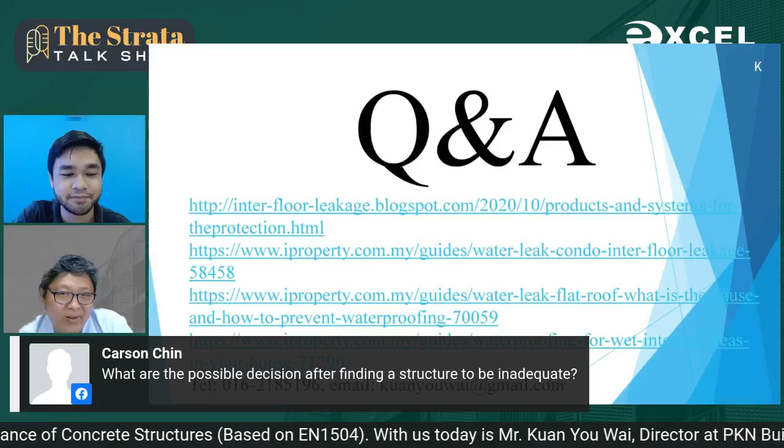Actually, my blog has been read quite widely, including by readers from North America. I don't know why, because English is my third language—as you can see, I don't speak very fluently. But because of my lack of proficiency in English, I write in layman terms, and that is very welcomed by the general public. That's perhaps why my articles have been read widely. iProperty told me my article on interfloor leakage is reaching 100,000 readers—it became a blockbuster on iProperty.

Awesome, sir. Any other questions? I believe that's all the questions we have for today, so we have reached the end of this talk show.